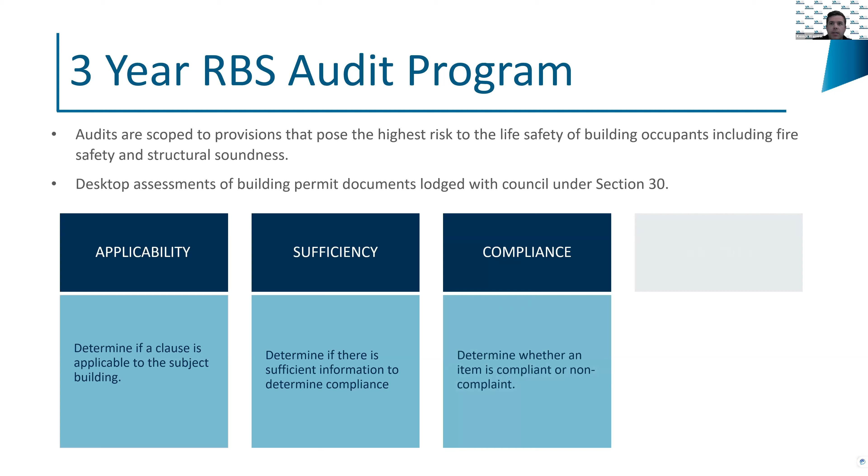So when we undertake the audits, we consider 4 elements. The first being whether the particular clause would be applicable to this particular building. Then we consider whether there's sufficient information for the RBS, the responsible building surveyor, to make that call about whether compliance is achieved or not. The third is whether the information is compliant or non-compliant. And then the fourth, interlinked with the third, is the compliance solution used, whether it was DTS, deemed to satisfy, or a performance solution, or a combination of these.

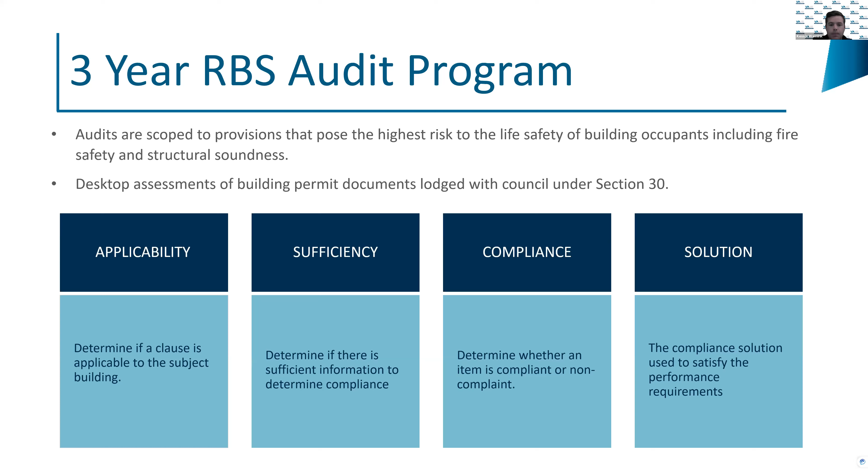As part of this RBS audit program, which we only started towards the end of last year, we undertook 35 site inspections on bushfire prone areas against the requirements of Australian Standard 3959/2018, being the relevant standard at the time for construction of buildings in bushfire prone areas. This was, as Amanda mentioned before, in response to those bushfires that occurred in the summer of 2019-2020, in which there were reported 313 homes that were damaged and destroyed.

So, as I mentioned, we do a desktop assessment of the Section 30 documents, and this was undertaken against the provisions of Section 3 to 9 of the Australian Standard for Bushfire Prone Areas, so the specific BAL requirements. We did not consider whether the bushfire attack level BAL rating had been correctly determined under Section 2 - we just relied on this being accurate.

So some of the background on the sites audited: the audits were undertaken on sites in 8 different municipalities, mainly those impacted by bushfires in recent years. We can see on the screen now South Gippsland, East Gippsland, Alpine and Latrobe, as well as Towong. And in past years, we've had some fires around Corangamite in the Wye River and the like.

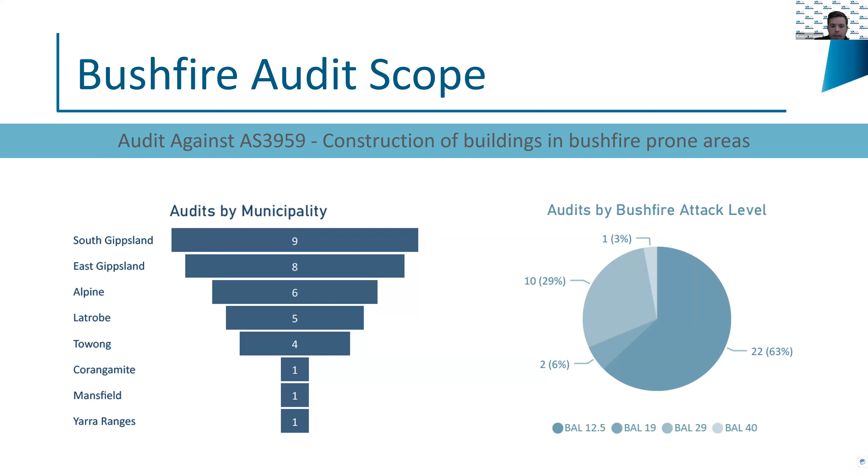Of the 35 audits completed, there was an average of 15 non-compliances per audit. Generally, the non-compliances were consistent across the locality, the BAL rating, the practitioner type, and the number of stories. With some of the smaller sample sizes in some of the localities, BALs, and stories, this will account for that discrepancy where we can see some only had 5, while others had more.

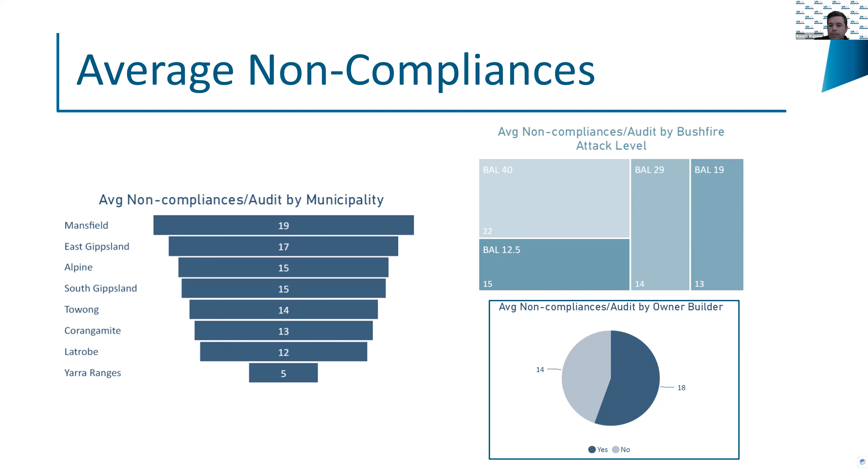It was found in the audits that the plans generally lacked the information required by the relevant building surveyor to make a determination of compliance against the standard. In most cases, there was insufficient information for the RBS to make a determination against the clause. For example, with sarking, the product to be used was not specified, so there was no information to assess whether the sarking complied with the required flammability index, and the same goes for how the weep holes, vents and other gaps would be protected. There was no information, so there was no way of seeing whether the product would comply. In some instances we did see, it was great to see that the mesh was being used, but not all of the plans had that information.

As I mentioned before, we looked at sufficiency of information. The key areas of information for specific construction requirements in Section 3 to 9, which cover the specific BAL levels 12.5 through to Flame Zone: glazing didn't have any details of the thickness, so there was no way of determining if it had the minimum thickness required for that BAL rating level. For external walls, the material being used was not specified, only vague terms such as weatherboards, so it's unable to be determined if it would be non-combustible or a bushfire resisting species as required by the standard.

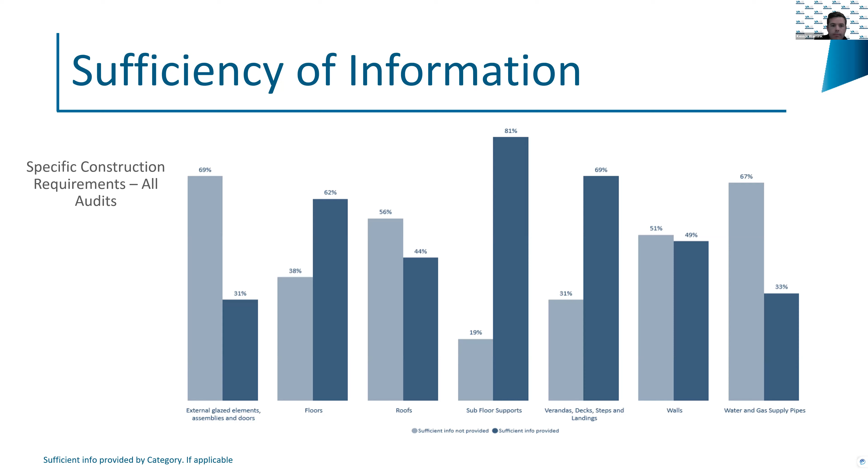For the compliance outcomes, if there was not sufficient information for us to determine that something complied, we had to mark this as non-compliant. Going forward, our audits will look to separate non-compliances where there is insufficient information to determine compliance from those where the plans showed a material non-compliance, so we can better understand whether it's just a lack of information, or whether the building surveyor had approved something on the plans that was actually incorrect.

Some of the non-compliances against section 3 which we found were with weep holes and gaps. The incorrect notation to the clause was used, such as only screening gaps greater than 3 mil rather than 2 mil. This could be related to a change in the standard between the 2009 and 2018 versions, which changed that requirement, and maybe the notations on the plans weren't updated to reflect the new requirements.

For specific construction requirements for sections 5 to 9, some of the non-compliances we found were the incorrect thickness of glazing, so where 5 mil was required, 3 or 4 mil had been specified. Where screening was required to a window, it had not been nominated, or the incorrect material type had been nominated.

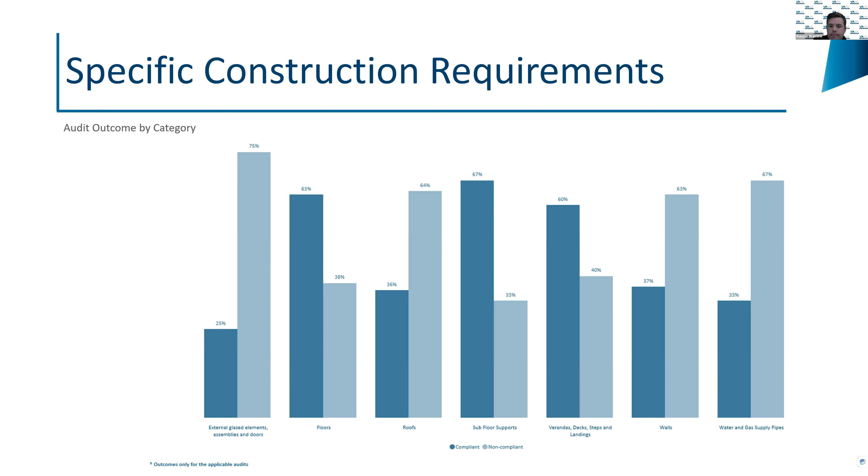So now I've provided some background on the audit, I'll go through and highlight some of the legislative requirements and roles and responsibilities in the process, and the documentation required to demonstrate compliance.

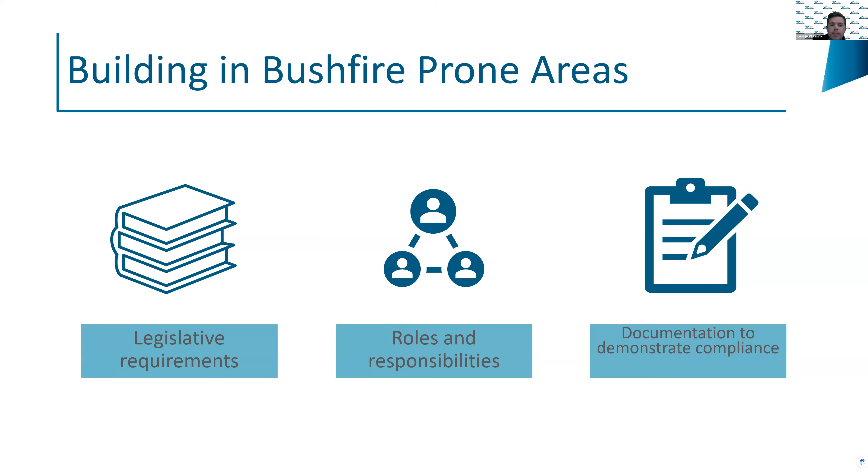Section 24(1) says that a building surveyor must not issue a building permit unless they are satisfied that the building work and the building permit will comply with the Act and the building regulations. Therefore, if the plans and specifications do not have the information required to demonstrate compliance, then the RBS should be asking the applicant for more information or refusing the permit if that information is not forthcoming.

Some other regulations to consider for building permits in bushfire-prone areas: Regulation 156 requires the RBS to accept a bushfire attack level specified in a planning scheme or any site assessment for a planning permit, despite anything contrary in the BCA. The other one, which is really important, is Regulation 157, which requires the responsible building surveyor to accept a bushfire attack level of at least 12.5.

So if a property is in a designated bushfire prone area, regardless as to whether it has been deemed low, we saw in the audits that this is what building surveyors had been doing—where a site assessment came back as low, they had required the provisions of BAL 12.5 to be applied to that building, as required by that regulation.

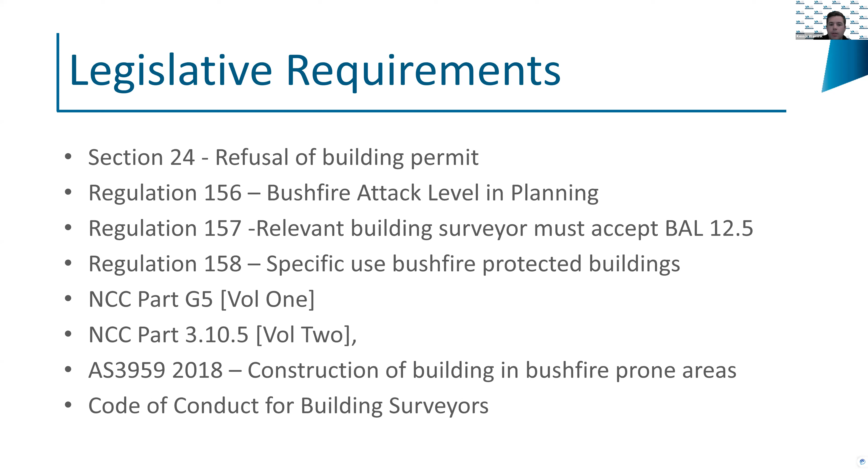So, roles and responsibilities in the process. Everyone has their part to play in ensuring that buildings constructed in bushfire prone areas are safe. Planning departments and planning schemes can set specific requirements for certain areas, and the first step should be to determine if there are any specific planning requirements for your property, any overlays or bushfire management plans and the like.

Bushfire consultants can be engaged to complete a site assessment and determine the bushfire attack level rating. When doing this, they should ensure they're determining the BAL using the right fire danger index level in Victoria - either 50 in alpine areas or 100 generally. Obviously in other states there's a different fire index rating. They should also be attending the site to accurately measure and classify the vegetation.

For designers, they should be ensuring that they are preparing the plans and specifications so that all required information to show compliance with the standard is detailed on the plan and in the specifications. This helps everyone when the building is being built and when it's being approved - if the information's there, it makes it a lot easier and we can avoid any problems down the track during construction that may require rectification.

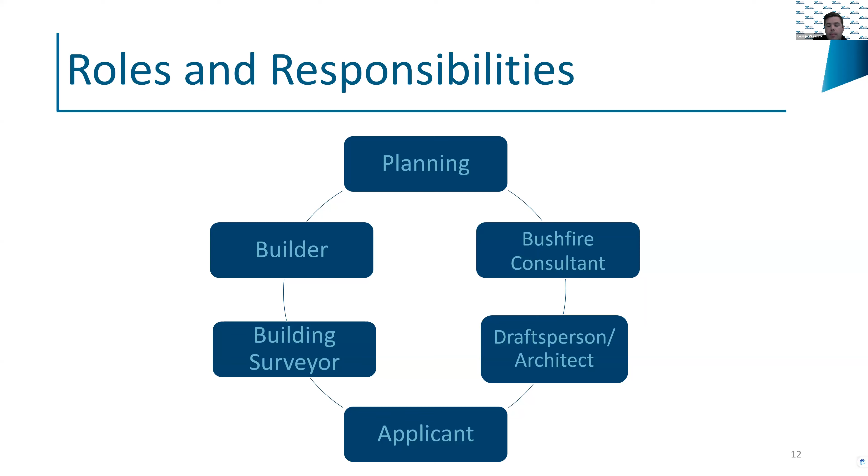Before discussing what documentation is required, it's important to understand that each bushfire attack level is trying to achieve different outcomes. The number in the BAL rating corresponds with the increments of radiant heat expressed in kilowatts per metre squared. Humans can feel pain after 10 to 20 seconds of exposure to radiant heat of 4 kilowatts per metre, while some materials such as dry timber can ignite at 12 kilowatts, and a bushfire can reach 100 kilowatts. So even at BAL 12.5, humans would be starting to be overcome by the heat.

There are three main ways a bushfire can impact a structure: ember attack, radiant heat, and direct flame contact. Each BAL rating is designed to respond to the level of impact these three factors can have. Ember attack is the most common way a house can catch fire, and embers can often impact a structure kilometres ahead of the fire front, whilst radiant heat can ignite surfaces without direct contact.

This is why assessments usually talk about at least 100 metres, but obviously a house can be impacted a lot further ahead than 100 metres. So BAL 12.5 is primarily concerned with protection from ember attack and radiant heat up to and including 12.5 kilowatts per metre squared, where the site is less than 100 metres from the source of a bushfire attack.

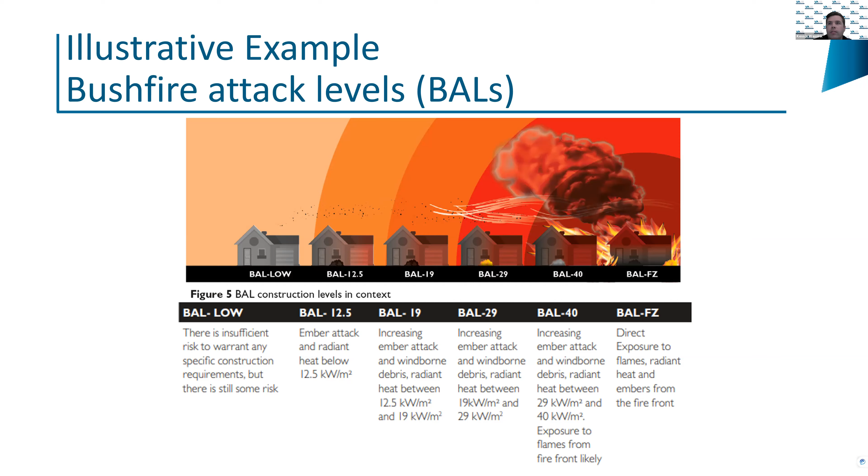So this is why there are different BAL requirements and materials in each BAL level. Some are focused on preventing embers, while others are focused on actual radiant heat or then direct flame contact.

So what to include and to avoid when designing or approving a building? You should include the exact part of the clause that applies. Many clauses have multiple options to achieve compliance. Therefore, the plans and specifications should indicate which option is being used to achieve compliance.

For example, for protection of glazing, you would state that the window has corrosion-resistant mesh bronze screen with apertures less than 2 mils. If you're not using bushfire shutters, you wouldn't mention that. You're detailing the relevant information on the plan, so it should be clear and only the relevant information. If the building doesn't have bushfire shutters on it, then there shouldn't be a reference to it.

This makes it easier for practitioners to see the required information, determine compliance, and construct the building, including evidence that demonstrates compliance. How can the building surveyor be satisfied that a product complies if there are no details of what that product is?

Evidence of suitability, such as code mark certificates or data sheets that detail the material to be used, test reports, should be supplied with the application so that a relevant building surveyor can check these and make sure they comply. For example, with sarking, the building surveyor needs to check the flammability index, so they would need some evidence of this information so they can check that it's right.

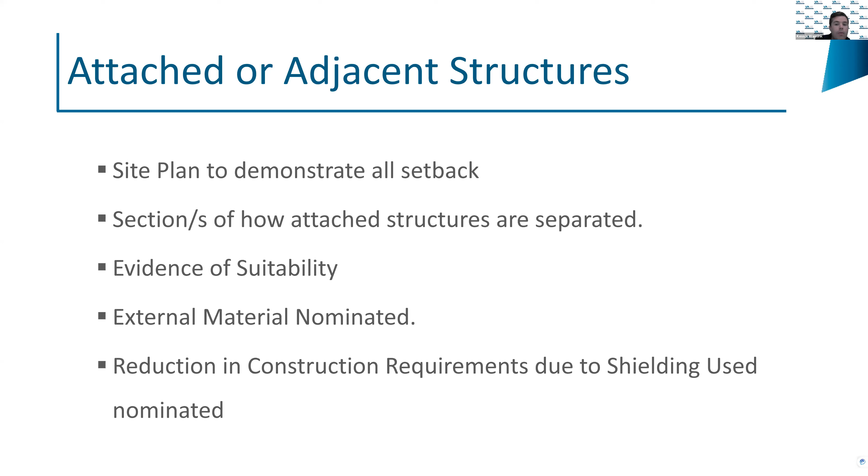Compliance for floors can be achieved through a number of methods, most commonly concrete slab on ground, and the standard doesn't provide a requirement for concreted floors.

However, for other materials where a structure is raised, either the subfloor space needs to be enclosed or the floor is required to comply. The subfloor can be enclosed with a wall that conforms to the same requirements as an external wall, or mesh sheet as per the standard.

Where the subfloor is not enclosed, the plans need to show the materials used in the construction to comply with the standard. It was observed in the audits where a second story was overhanging a lower deck area, and the underside of the second floor to a habitable room hadn't been protected where it was required to be.

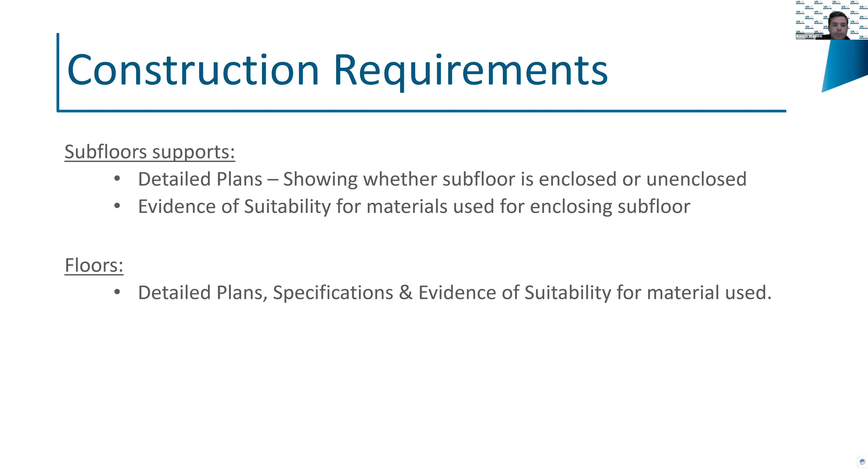So for external walls, there's a variety of materials that can be used depending on the BAL rating to achieve compliance. But generally the exposed component needs to be non-combustible to some degree - e.g. in the lower BALs, it's just the lower 400mm above the finished ground level. In higher BALs, it might be the entire wall.

It was observed during the audit that some of the plans did nominate the external wall material, and as mentioned before, they used vague terms such as weatherboard. The specific product should be nominated, and any evidence of suitability that demonstrates compliance provided where a material outside of those listed in the standard is used. This way the building surveyor can check that the product is non-combustible as required.

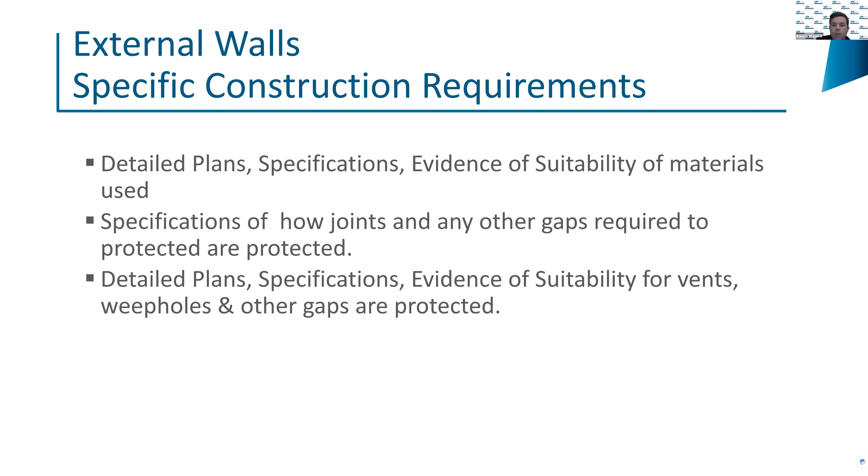So for glazing bushfire shutters, if you're using those, you need to have evidence that the shutters will protect the entire window or door, including the frame. You should have a window or door schedule, and it should provide the glazing thickness and the type of glazing, e.g. toughened, and also any screening material where required.

We identified in the audits that there were no schedules on a lot of the plans. We used the energy efficiency report, and we saw that it nominated the wrong glazing thickness. And then where there were window schedules, they weren't consistent with the energy efficiency report, and the wrong glazing was nominated - so 3mil or 4mil instead of where 5mil was required.

For window and door protection, if it's being screened, the screening material such as bronze, and then the aperture thickness should be nominated.

Some of the plans we saw only had fly screen nominated, so it was unclear whether this would just be a standard fly screen that you can have on any house, or one that would meet the requirements and be bronze with less than 2mil apertures. We also saw some where the screening had the wrong aperture size nominated.

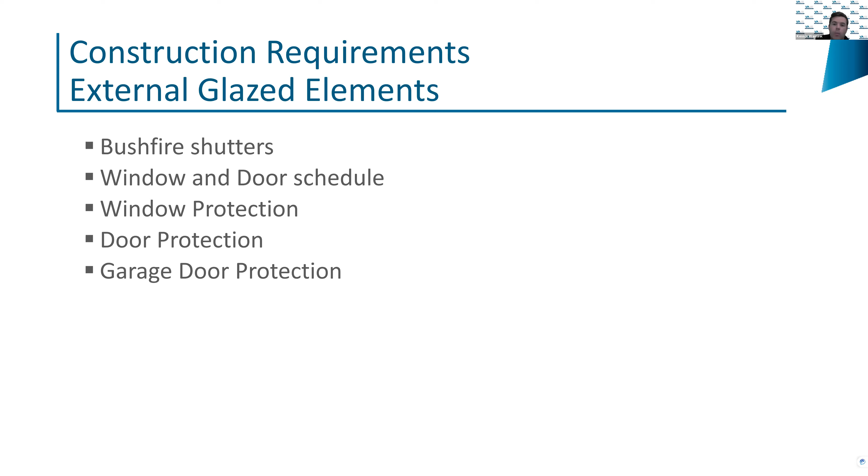For garage door protection, the plans need to nominate the material and how the gaps are sealed. In some audits, we found there was no detailing of the requirements to seal those gaps, and those garages were not detailed as being separated from the building, so they were required to comply with the standard.

For roof material, nominating on the plans and detailing materials, including verandas, carport and awning roofs. Roof gap sealing - nominating on the plans and detailing how gaps are sealed.

And again, this could be nominating that you're using a non-combustible mineral wool in the ridge or using sarking. As mentioned before, when you're using sarking, you need to have that evidence of suitability so the building surveyor can check the flammability index.

But also it's important to have details of how that sarking will be installed, so the builder can see exactly where it needs to go over different parts of the roof structure, to make sure it's fully sealed or protected from embers entering the building.

For roof penetrations, including ventilators and evaporative units, you need to nominate on the plan the type and extent of penetrations, how they'll be protected, what materials are to be used, and the aperture size. For roof skylights, you should nominate the skylight product being used and provide test reports that validate that product complies.

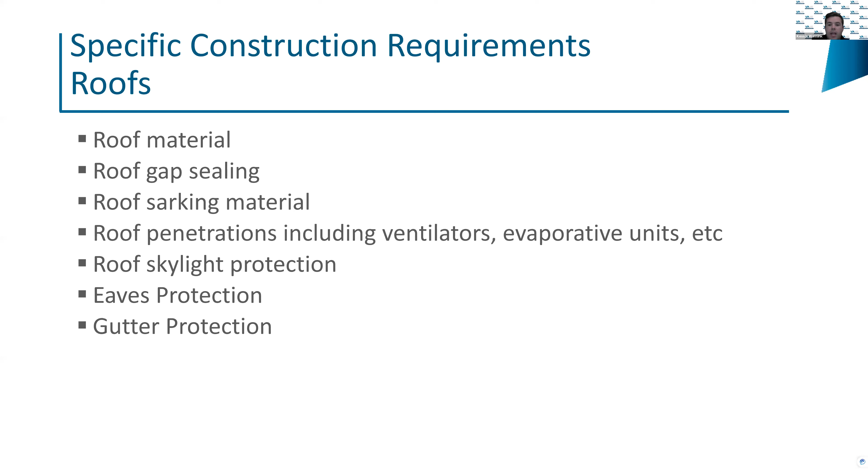For eave protection, nominate on the plans the eave material, including how gaps will be sealed. For gutters, nominate the material to be used. For box gutters, nominate the material and detail the flashing and how this is sealed. And if you're using leaf guards, nominate what material that is because it's required to be non-combustible.

For verandas, the post material should be nominated. Some BALs allow for bushfire resisting timber, whilst others require non-combustible material.

For decking construction, whilst there is no requirement to enclose the subfloor space of verandas, decks, steps, ramps, or landings, there are some requirements when this space is enclosed, and in some BAL levels the decking shall not be spaced. Consideration of this needs to be made for each bushfire attack level, and it's important for this information to be detailed on the plan so the builder knows the construction method required is different.

For trafficable surfaces, stairs and landings, the materials need to be nominated as each BAL rating has a different level of requirement. While some lower BALs allow for PVC type materials and bushfire resisting timbers, others require the material to be non-combustible.

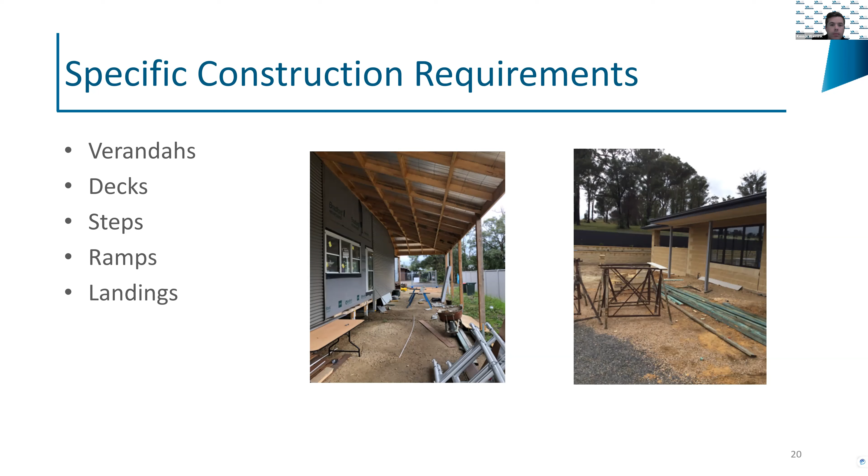For water and gas supply pipes, most of the plans we looked at didn't nominate this material. So it's important to nominate these on the plan and how it's going to comply, to avoid plumbers using the wrong material. Also, the standard doesn't really provide a provision for it, but it's important to have consideration of where gas bottles will be located if you're going to be using them.

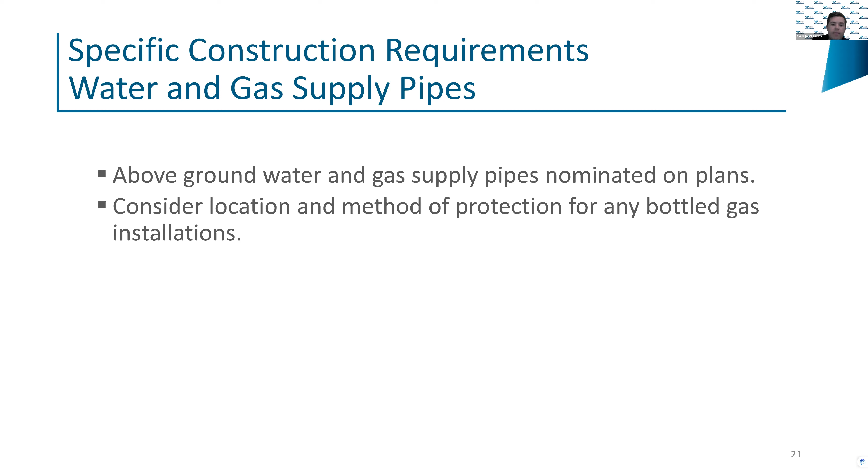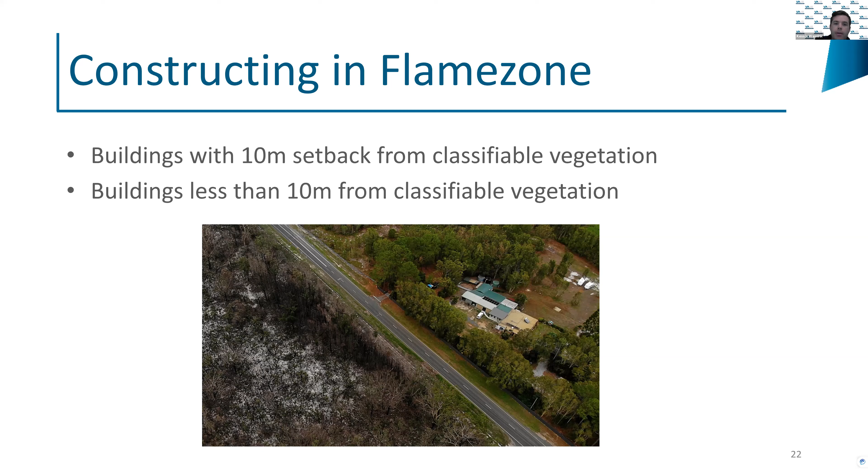The last one I'll touch on is constructing in a flame zone. Where a building has been assessed under Section 2 to determine the bushfire attack level and has a minimum setback of 10 metres from classifiable vegetation, it can be constructed in accordance with clause 9.2 to 9.8 of the standard. But where a 10-metre setback cannot be achieved in a flame zone, the elements less than 10 metres need to conform to or be tested to AS 1530.8.2. So basically, you have to use a tested system if you're in a flame zone and the component is less than 10 metres from the classifiable vegetation.

Lastly, I mentioned evidence of suitability, and it's important to have this to demonstrate that a product complies with the standard. When assessing this documentation, the building surveyor should consider whether the evidence demonstrates compliance by a deemed-to-satisfy solution or by performance. Some code marks are for compliance with performance requirements rather than deemed-to-satisfy provisions. This can be the case for some EPS products, which are combustible when tested in accordance with AS 1530.1. However, they've been tested and considered under the code mark scheme as potentially suitable still in a bushfire prone area.

However, where this is the case, a performance solution should be developed, and the building surveyor should make a determination under Regulation 38 that the product complies with the performance requirement. The code mark would then form part of that performance solution being developed.

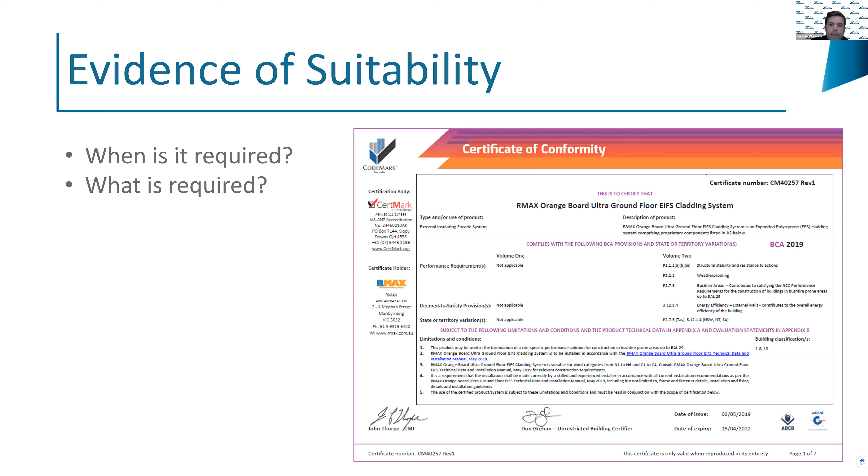From here, our proactive inspections team have recently completed inspections on dwellings in bushfire prone areas in East Gippsland to see if there's been a translation of the poor documentation into on-site non-compliances, and they'll be publishing a report with those findings.

We'll be providing education to practitioners to improve their quality, and this webinar is the first part of that. We'll also be developing other practice notes and information to help everyone understand the requirements. Down the track, we'll do further auditing to gauge whether the quality of documentation has improved and where further improvements are required. We'll be developing further education material detailing the minimum documentation requirements, which will be published later.

So just a bit of a summary: hopefully now you have an understanding of the audit process we went through and what we found, including that there was a lack of documentation and detailing on the plans for building surveyors to make a determination on compliance and be satisfied.